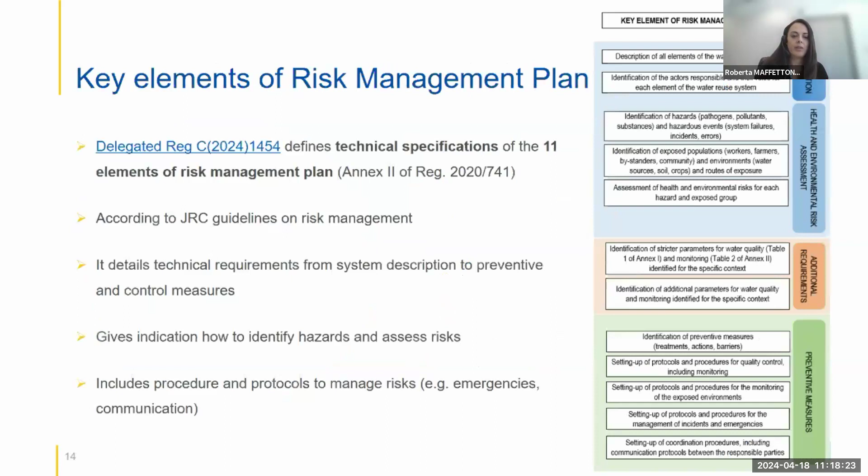Digging into the risk management plan, the delegated act defines the technical specifications of the 11 elements of the risk management plan that are indicated here on the right. It's been developed according to the JRC guidelines, and it details all the specifications for the elements, from the system description to identifying risks to setting up preventive measures and protocols for risk management. The risk management plan extends from the entry point of the urban wastewater treatment plant to the final use in the agricultural field.

Here is a schematic that I just wanted to share to give an idea of how hazards, pathogens and pollutants, could be screened in the reclaimed water for the risk management plan, considering the applicable legislation that is required within the specific water reuse systems. This assessment should consider any pathway of the reclaimed water to reach sensitive targets, so environments at risk or workers.

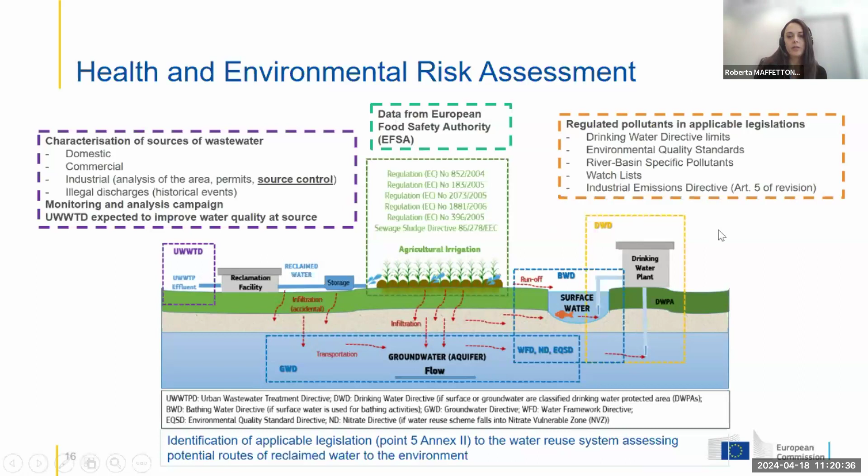What I wanted to highlight here is that it's very important to characterize the source of wastewater at the beginning, considering source control to reduce pollution, and hopefully with the new rules of the Urban Wastewater Treatment Directive, it is expected to improve water quality at sources. It's suggested to understand how to reduce pollution based on regulated pollutants in applicable legislation for targets within the territory, and also what could be applicable to food and feed in agricultural irrigation.

Very quickly, I will give an overview of our technical workshops that are ongoing, covering several topics. One topic is the risk assessment of contaminants of emerging concern in the risk management plan. This is ongoing because many member states and stakeholders have asked us to give more indication on how to consider these contaminants. So we tried to bring experts and stakeholder groups together and see what the ongoing research is on assessing risk of contaminants of emerging concern, also exploring methodologies for selecting these contaminants to include in the list of hazards. We will have another workshop on the same topic in June.

And also we are also exploring water reuse beyond agriculture irrigation. We have a technical workshop on industrial reuse, where we highlight that the sector in some parts of Europe is using municipal water for industrial application, especially in cooling systems and in the process production, for example, pulp and paper, and we will have a next workshop in September 2024.

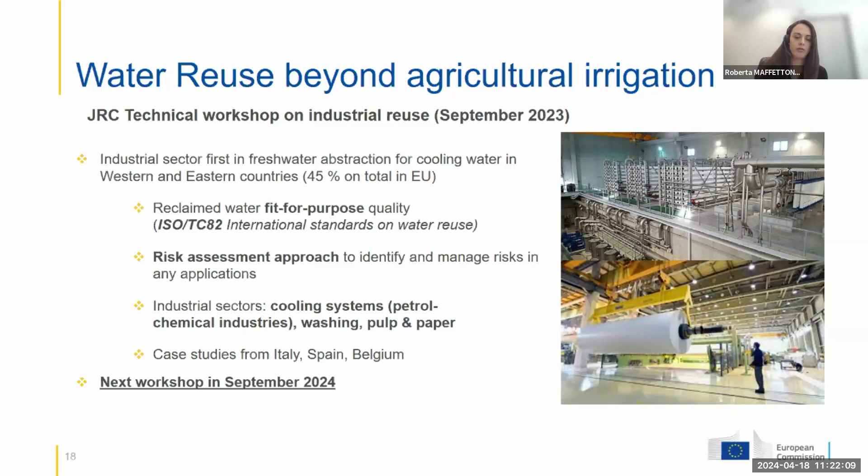And also we explore urban and environmental applications of reclaimed water, which include irrigation of urban parks, with the example of Lisbon and Madrid, and methodologies of risk management and determination of water quality for park irrigation by, for example, ISO standards. We also learn about the possibility to use reclaimed water for other uses like snow production in the Baltic Sea region or for environmental restoration in the south of Italy.

So very quickly, conclusions. The regulation is ongoing and is being implemented in the member states. In the member states, the water reuse systems are currently drafting risk management plans. The new legislations, the Urban Wastewater Treatment Directive and the Industrial Emission Directive, will facilitate water reuse. There is a potential of water reuse beyond agricultural irrigation, especially in Western and Eastern countries. We still see many challenges that will be addressed with the working group and with the stakeholders of the member states, and JRC will support continuously the implementation of water reuse with technical workshops and scientific advancement.

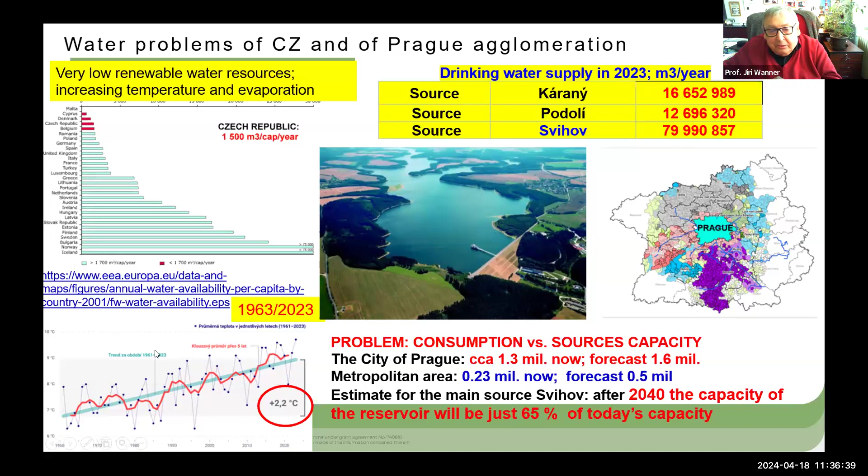And within our project, we wanted to demonstrate the safe use of reclaimed water from the effluent from the local wastewater treatment plant after certain post-treatment for the irrigation of typical municipal greenery. We use the river water for comparison, and we compare this river water with the tertiary treated effluent after disinfection, and the effluent after ultrafiltration and UV disinfection.

We have been performing 24 months of controlled irrigations, and we tested the quality not only of the water, but also plant biomass, soil matrix, and the drainage water, just to study the possible contamination of groundwater. And we used these 2 years for a very intense presentation of the experiments and the demonstration units to politicians and also to the general public.

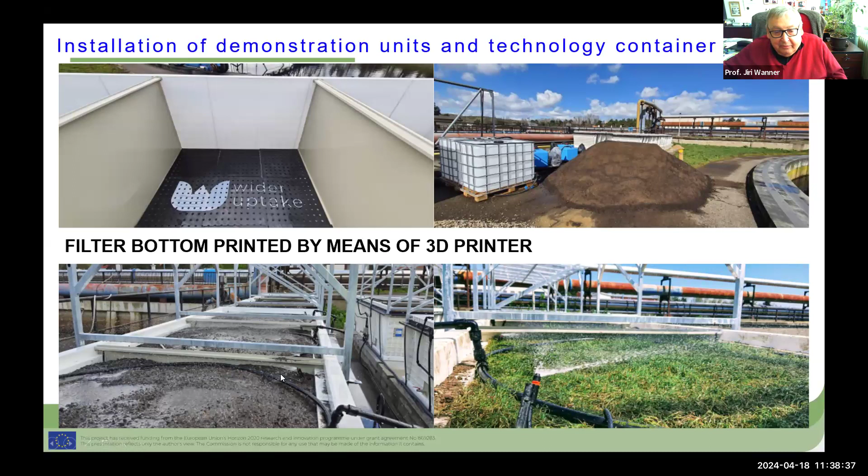Here you can see a few snapshots of the demonstration units. They were made of plastic with a drainage bottom, which enabled us to study also the water penetrating through the layer of soil. The units were equipped with sprinklers distributing the irrigation water. And as you can see, the units were divided into 3 compartments, and each compartment was hosting specific representatives of the municipal greenery: the grass, flowers, and bushes.

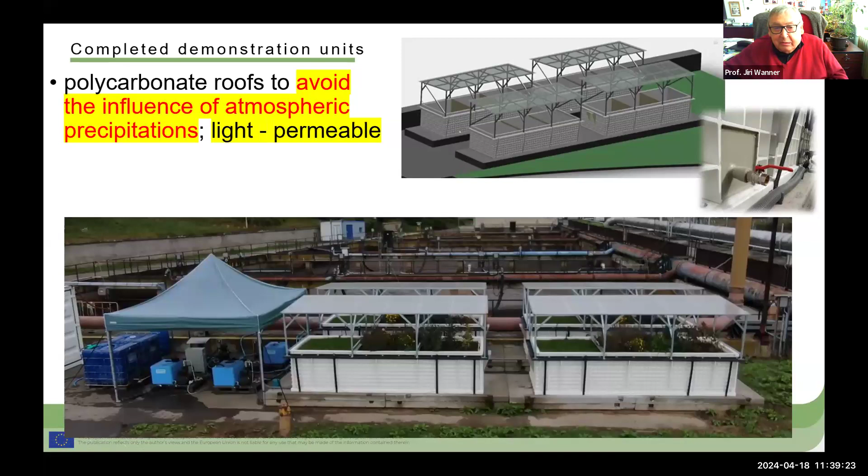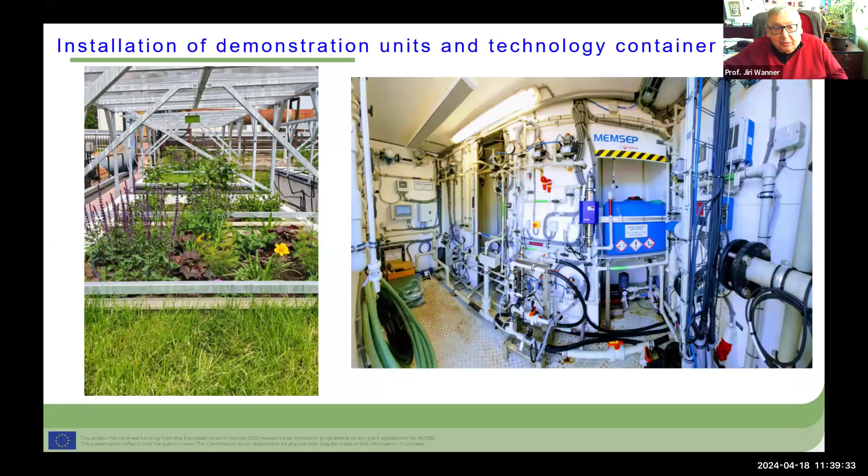The demonstration units were covered by polycarbonate roofs to avoid any interference with atmospheric precipitation, and at the same time to permit daylight to the plants. So for those 2 years, the plants have been irrigated only with the irrigation water, with no atmospheric precipitation. Here you can see also the unit which was used for the disinfection and ultrafiltration of the effluent from the Prague wastewater treatment plant.

We can say after 24 months of irrigation experiments that we were steadily able to achieve Class A according to the chemical quality, according to the regulation of the European Union. There was a question in the previous presentation about heavy metals. So during our 2 years of experiments, we didn't observe any big difference in trace elements content in the irrigation water in comparison with the river water. We measured about 60 different types of micropollutants, like pharmaceuticals and hormones. And we didn't observe any accumulation in the plant biomass.

Concerning the microbiological quality, the ultrafiltration plus UV disinfection was safely achieving class A according to the regulation. We were also interested to know whether there could be some salinization of the soil after 2 years of irrigation without any diluting effect of precipitation. And we can conclude that the effluent which was used didn't harm the plants and the soil microbiome. The salinity of the effluent was slightly higher than the salinity of the river water, but it was not accumulated in the soil.

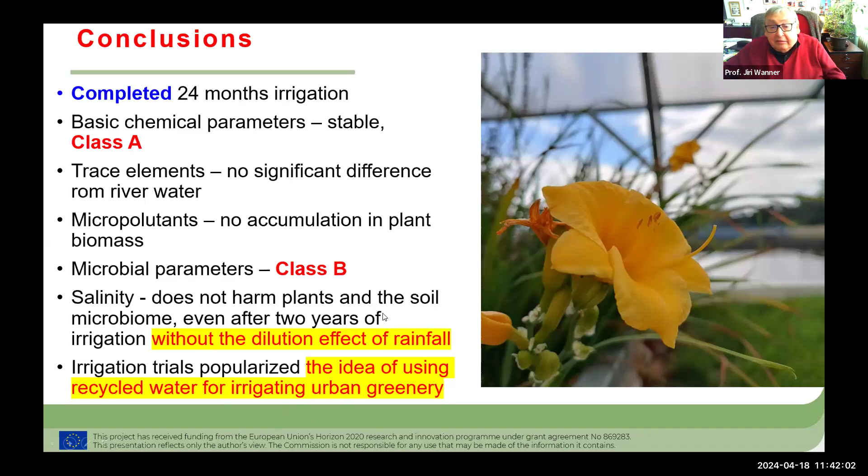So with this, I can conclude my brief report about the project. I would like just to draw your attention to the nice flowers which we were able to cultivate during the irrigation with the effluent, and the effluent didn't cause any harms to any insects. On the other side, the bees especially liked our flowers, as you can see.

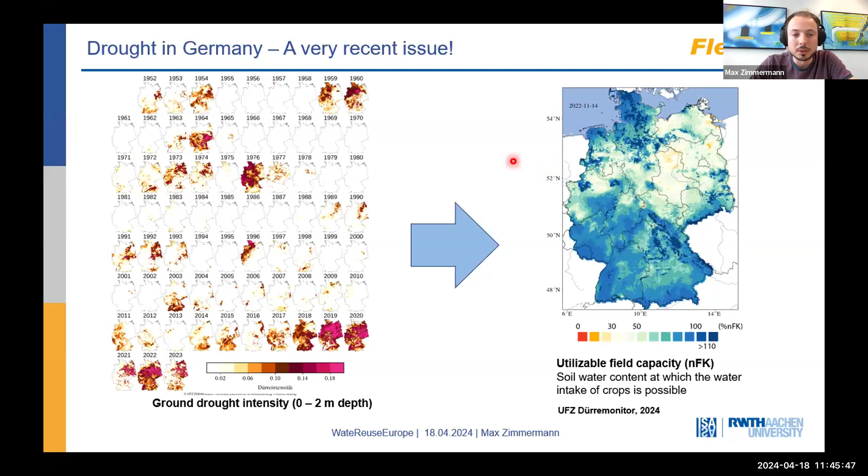And probably most of you know that these drought conditions can be directly converted into the so-called utilizable field capacity, which means that in the lighter colored areas here, the crop capacity of the fields decreases to below 50% of what they used to have. Slowly rising awareness for water scarcity issues in these areas, and therefore also slowly increasing the demand for water reuse in Germany. And another thing that's very relevant, before we look into the project, is the current legal situation in the country.

As we heard from Roberta as well, you're all aware of the EU Regulation 2020/741 that is active and must be followed since June 2023, also in Germany. And currently, a process of putting this water reuse regulation into national law is on its way, which is still ongoing at the moment. And it is expected to become substantially stricter in some aspects, probably posing a challenge to introducing and implementing more water reuse projects in Germany.

This national law will then be based on a technical guideline that is split into 3 different parts: the basics, the requirements, mostly the technical requirements, and implementation. And the FlexTreat project that I'm going to present to you soon is mostly set in the context of these technical requirements. We're going to see that soon.

There is one more development, though, that's also very relevant, and that is the EU Urban Wastewater Treatment Directive. I think most of you will have heard that just recently, on the 10th of April, the proposal has been adopted by the Parliament. So this will introduce the requirement for micropollutant removal to bigger wastewater treatment plants.

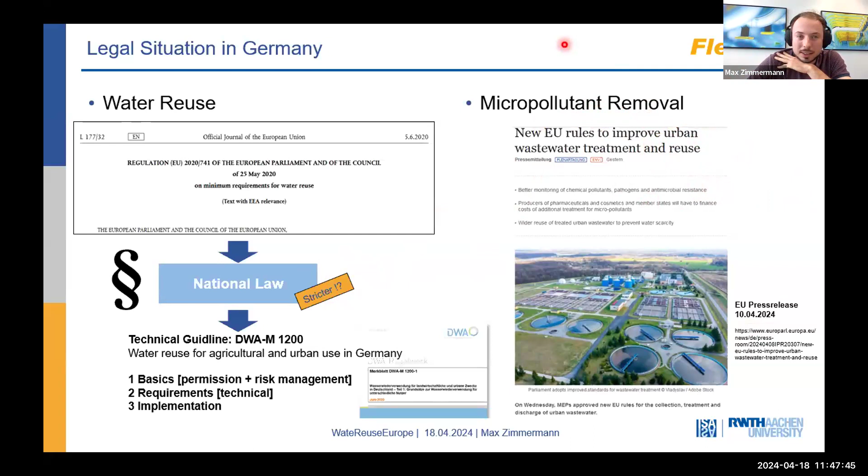And anticipating these 2 developments, a strict water reuse regulation and the micropollutant removal, the proposal for FlexTreat was written. So what we try to do in this project is find synergies between micropollutant removal and water reuse disinfection technologies. The project is split into 4 work packages, some of which we're going to look at now, just very briefly, starting with the technologies.

As I said, we're mostly looking at synergies here. So we chose 4 different treatment trains in this project that are mostly piloted in half technical scale, except for one site that's already implemented in large scale. This is an ozonation followed by filtration and UV disinfection in Brunswick, Germany, one of the few places where agricultural irrigation is already being done in the country.

A second technology train in Rheinbach, Germany, consists of a constructed wetland with additives of granular activated carbon for micropollutant removal, followed by disinfection in form of conventional UV or UV LED to compare and do research on the comparison. Another option that we're looking at is powdered activated carbon dosing in front of ultrafiltration membranes, followed by UV disinfection in the effluent. This part actually being what my PhD is going to be based on.

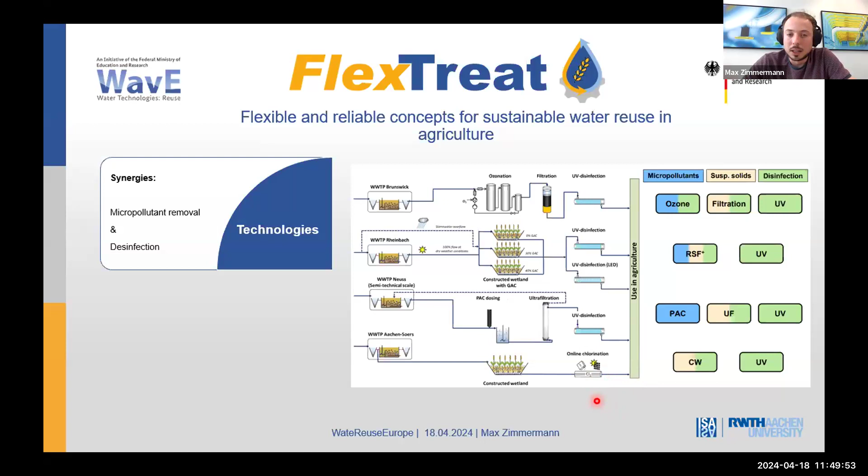And one last option, a bit more, let's say low tech, but a very clever idea, is the combination of constructed wetlands with so-called online electrochlorination, which has the opportunity to reduce the chlorine dose by quite a bit. However, chlorination in Germany is seen as very critical and will probably not find its way into application anytime soon.

So what do I mean when I say we're looking for synergies between these technologies? I brought one example of this, looking at the ozonation treatment train. So what we see here is the E. coli concentration at the different stages of this treatment train. And we can see a reduction in the conventional activated sludge process, and then a big reduction in the ozonation stage.

What we have to say here is that our ozonation stage is not aiming at disinfection, not complete disinfection of the water, but the ozonation stage is run in a way that's economic for 80% micropollutant removal. So while removing micropollutants, you also partly disinfect the water, and then only this last bit, 2 log stages, must be removed by UV treatment.

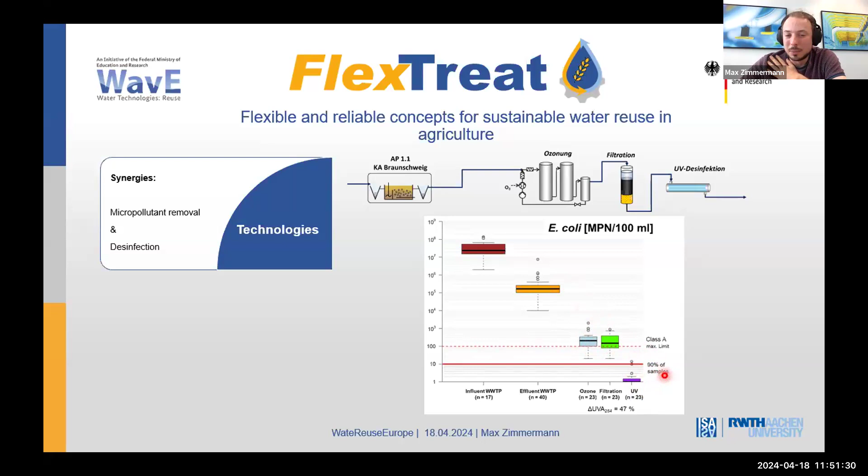And now, of course, this is kind of an obvious synergy that the ozonation already reduces the E. coli concentration. But what you cannot see here, but is more of a hidden synergy, is that ozonation also improves the UV transmission of the water quite a bit by 10 to 20 percentage points. And that will allow for a much more economic UV treatment afterwards. Unfortunately, I don't have any cost saving numbers yet. We are working on that currently.

Next, I would like to talk about the risk management work package, because this really is the heart of the project. So it divides into 2 major parts: the microbiological risk assessment and the chemical risk assessment. On the chemical side, we're looking into the entire nexus of irrigation water, soil, and also contaminants in the plants. While on the microbiological side, we have a very wide spread portfolio of bacteria, viruses, spores. We're looking at antibiotic resistances, but also Legionella and the regrowth potential of the water that we create after our treatment. If you're interested in more detail on this, then feel free to contact me afterwards.

Then there is a dedicated work package on the utilization of the project results. And as we saw during the project, this is very, very important because, as I said, there's very little experience with water reuse in irrigation in Germany. And what we did in the project was acceptance polls and stakeholder dialogues. And they mostly show a very streamlined outcome, which is that we really need to work on our communication with farmers, with water companies, to give more understanding to the needs, the risks, the opportunities connected to water reuse.

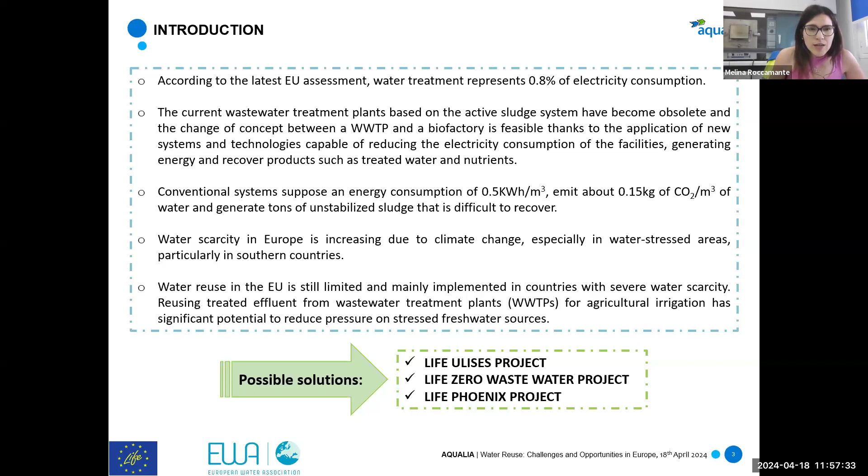Okay, LIFE ULISES project, the main goal of this project is to upgrade conventional wastewater treatment plants by different innovative technologies that produce useful resources from wastewater, such as biofuel, biofertilizer, and water for reuse. And the project aims to reduce energy consumption and minimize the carbon footprint of wastewater treatment plants, increasing their efficiency, by the integration of different technologies in each of their lines: water, gas, sludge.

A demonstration plant that integrates these different technologies has been implemented in El Bobar wastewater treatment plant in Almeria, in Spain. And these technologies are a novel anaerobic pretreatment technology based on UASB reactors called PUSH, able to produce biogas from raw wastewater and at the same time reducing its contaminant load with no need of oxygen or heating.

A novel biogas upgrading process patented by Aqualia called ABAD Bioenergy purifies and enriches this gas to generate biomethane, a biofuel that meets European standards. Using wastewater as absorption media, it offers a low-cost upgrading technology that can produce a competitive fuel for CNG vehicles. And this biofuel is tested in real driving tests during the project.